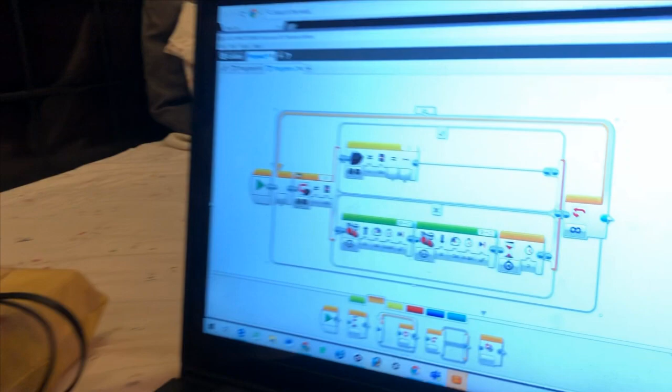Now I'll tell you the logic behind the coding part and the machine. First, I'll tell you the coding part.

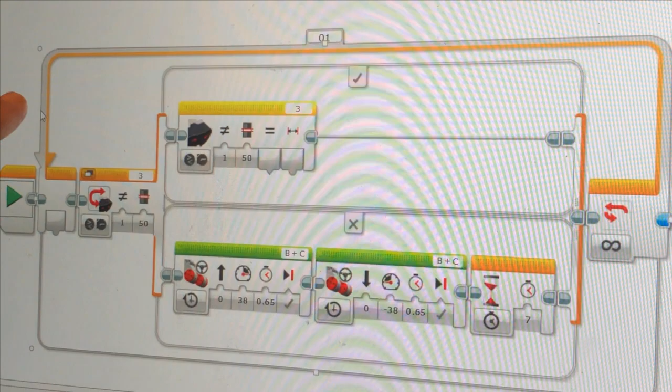This is the loop. But why are we using it? This is so that it doesn't finish if we put our hand under the sanitizer only once. If we put our hand underneath the sanitizer, it will give sanitizer, right? Now, if I put it like that again, without a loop, it won't happen. A loop makes it go again and again, and that's why we are using a loop.

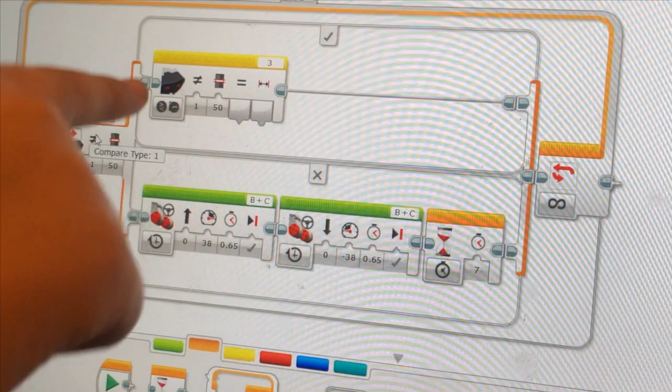Now, this is a switch button. We can call it a condition button or an if button. So this means that if the infrared sensor is not equal to, which means that if there is something underneath the infrared sensor, what will happen? The coding part in the cross section will happen.

So, it will first go a little bit up, towards the sanitizer, and then back to its original position. Then, it will wait for 7 seconds.

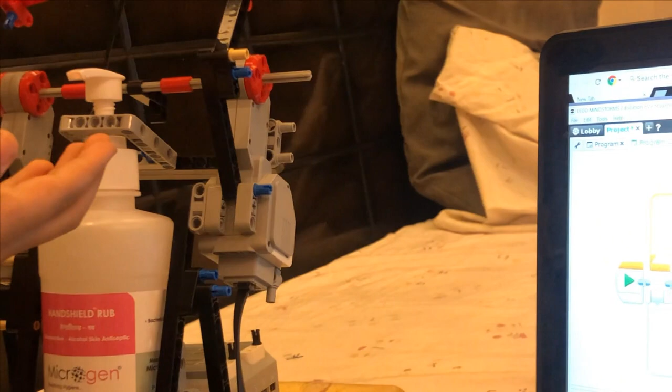But why 7 seconds? Because when we put our hand underneath the machine, it can go again and again without stopping. But we want it to stop, otherwise all the sanitizer will get wasted. We want sanitizer at this time especially.

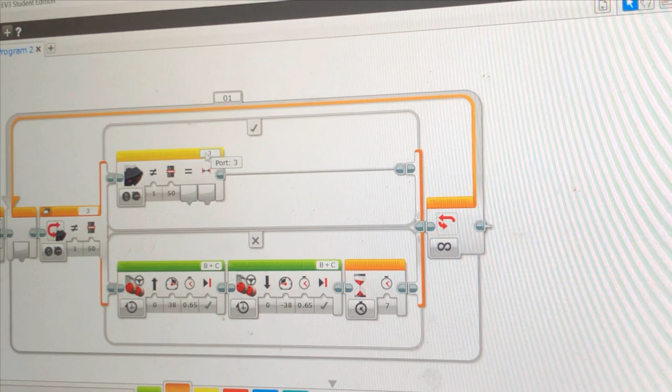Now, all the ports should be 3 or whichever number. Why? Because actually in this EV3, these wires, this is the motor. This is in B and C. The wires are in B and C. So we have to put B and C in both of them. Otherwise, it will not work.

Thank you. Now let's start the coding part. This is the program and we are going to make this in another program. I'll tell you how to make it.

So first, we need to go to the orange section which we can find. It will come as flow control. Click on that and you will find some switch. Now drag that switch into the play area.

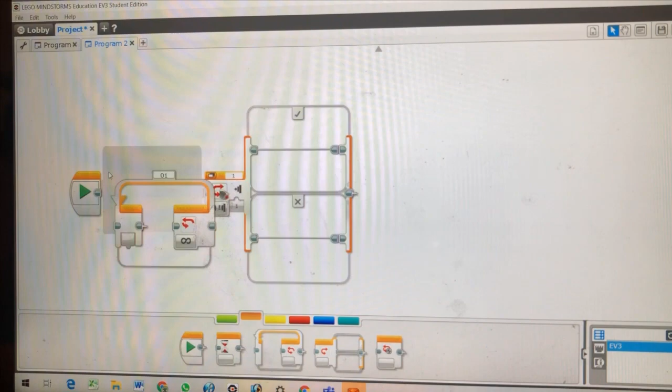Now you have to even drag a loop. Otherwise it will only happen once.

Now in this it's written port 1. We want it to be in port 3 because I have put an infrared sensor in the third one. Now we need to go on infrared sensor, compare, and then proximity. Now you will find this. We don't want this, but we want it to be not equal to.

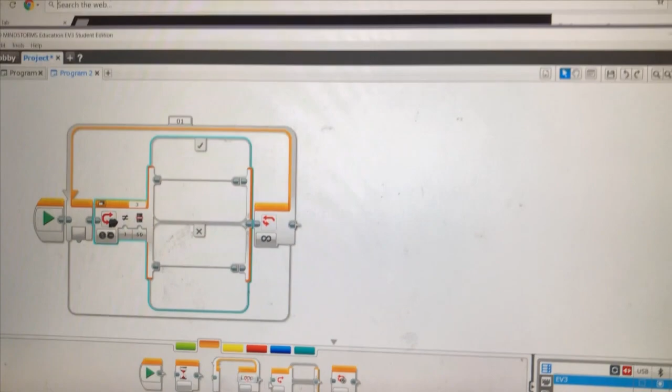Now we have to go to the green section, which we can find over here. It will be called action. There we can find a move steering block, which we have used a lot of times in our other classes.

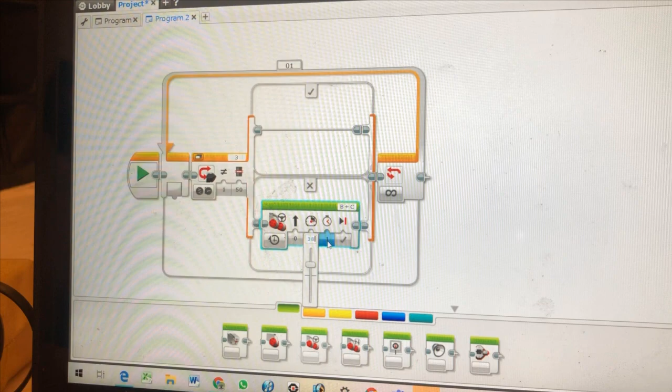We can put this inside the loop in the cross section over here. Now we want it to be on for seconds, and its speed can be 38 if you want it to work properly, or if you want it to press more, you can adjust it. And the time should be 0.65.

Now take another move steering block and put it just where the first block was. You need to put it beside that block, and it should go backward. Its power should be minus 38, or you can adjust it, but it should be the same. Just a minus should be there. But why are we putting a minus? Just so that it goes front and back.

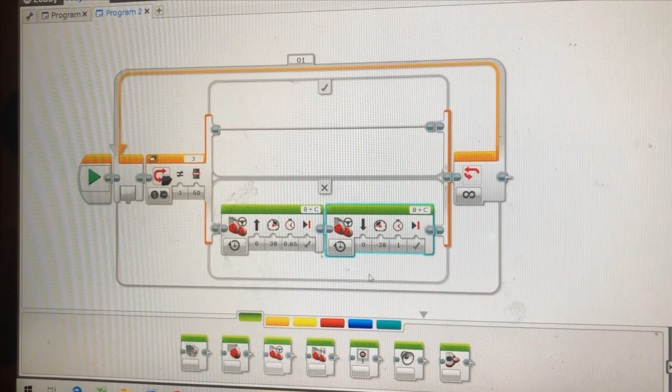Now we need to put it on for seconds and then change it to 0.65.

Now remember, the ports should be B and C. If you have put the wires in B and C, it's okay. If you have put it somewhere else, you can change it by clicking on B and changing it. I have put it on B, and C you can change it like this, or by clicking on B. I have got C, and this has to be B.

Now what is this for? This is for brake at end. Means when it finishes, do we have to stop or keep moving? We want it to brake at end.

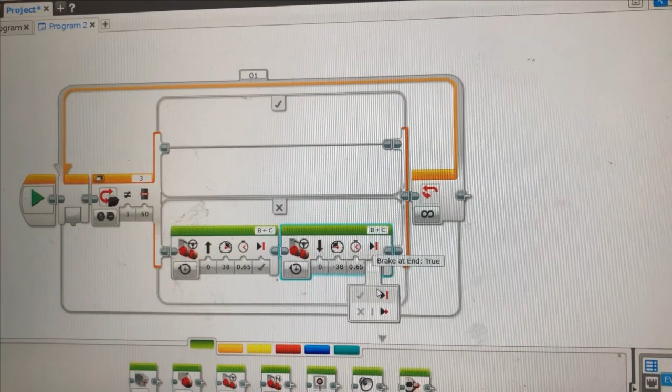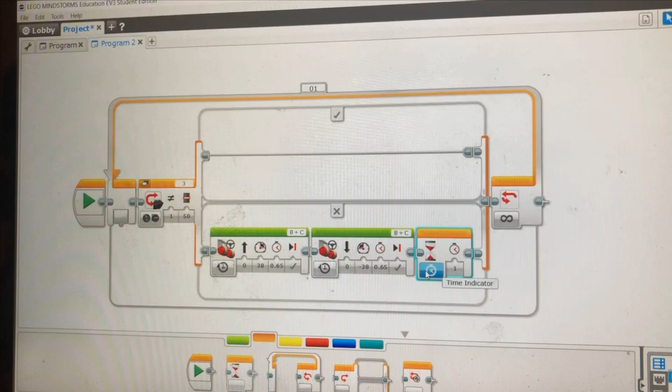Now we want a wait block, not between but over here, because if we put our hand in front of the sensor, meaning the infrared sensor, then it will sense it and keep on putting the sanitizer. We don't want that, right?

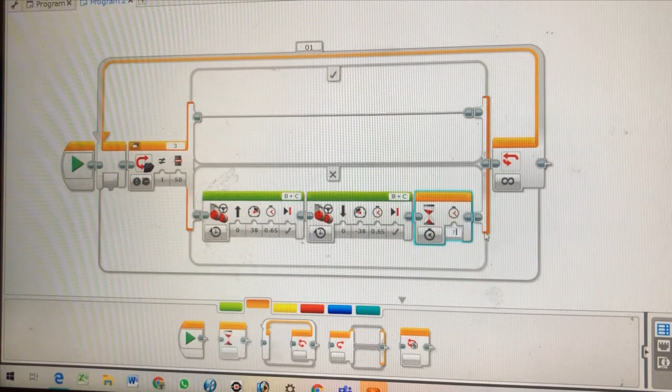So we can take this as time indicator and choose as many seconds as you want. I want it to be 7. 7's okay, right? Yeah. Now over here you see there is nothing else.

We want to go to the yellow section, which is called sensor, and go to the infrared sensor, which is right over here. Drag this into the tick area.

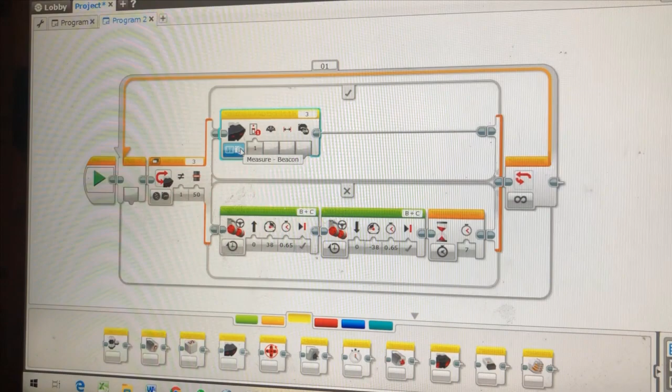Now you can see this is on measure and beacon. We want it to be on compare and proximity, and the port should be on the port which your wire is on. Now this should be not equal to, and the threshold value can be 50.

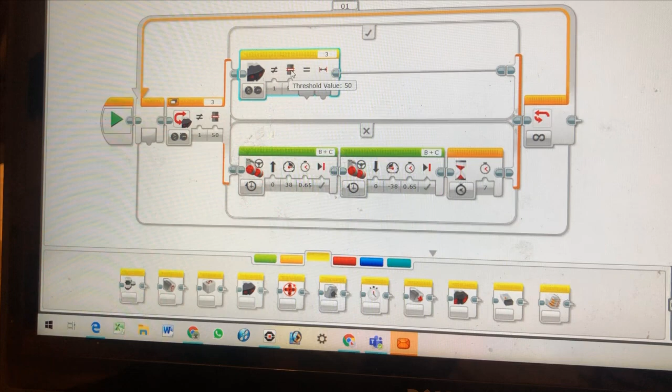Now why are we doing not equal to? Because if we do equal to, it will keep on doing every time. Not equal to means like the normal background is equal to. When it's not equal to, then it will just put the sanitizer on it.

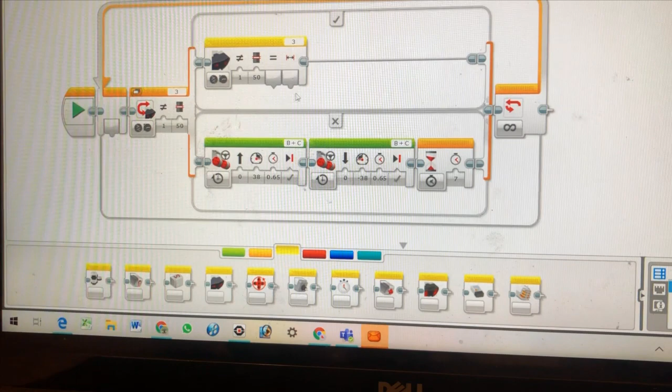Now, after this, we have to check if it works or not.